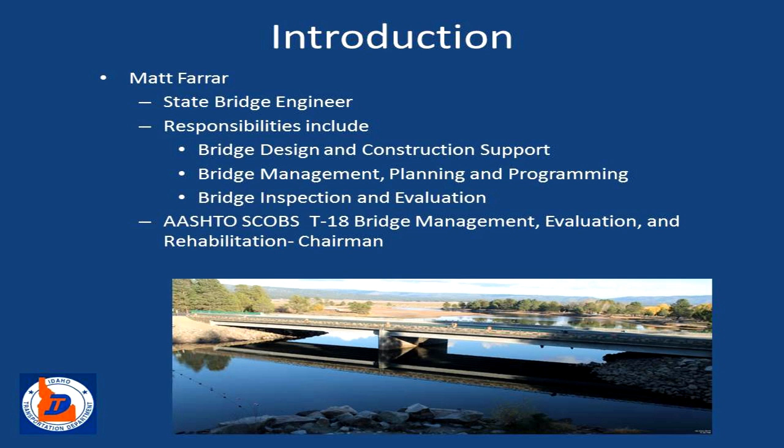It's quite an event. As Debbie mentioned, I'm the state bridge engineer for the state of Idaho. I was talking with somebody today, and he introduced me to a friend who said, 'Matt's the Bruce Johnson of Idaho.' I said, wait a minute... oh, well, that sounds pretty good, I'll take that. Bruce Johnson is a state bridge engineer from Oregon, and I have a lot of respect for him. I understand he's not here, but I thought, I'll take that. That's pretty good.

In Idaho, we spend about $80 million a year on bridges, about 15 to 20 million on bridge preservation, and about 65 million roughly on bridge restoration or bridge replacements. It's quite a challenge to address all our bridge needs with that amount of money, but we're doing our best. Along with those duties, I'm also the chairman of the AASHTO SCOBS T-18 Technical Committee on Bridge Management, Evaluation, and Rehabilitation.

What I'd like to talk about today is proposed changes on the horizon for the Manual for Bridge Evaluation and also the Manual for Bridge Element Inspection. Then I'd like to change gears a bit and talk about the FAST Act legal emergency vehicles and bridge posting, which is quite a challenge for all the states right now.

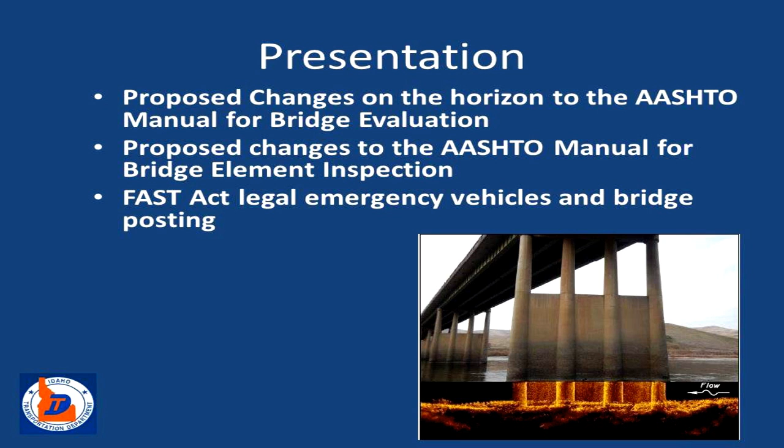I bounced this term around, T-18, and maybe a lot of you don't really follow what that means. T-18 is part of AASHTO SCOBS, and you might say, what's SCOBS? That doesn't sound very good, but that's the Subcommittee on Bridges and Structures that AASHTO has created. It's populated with the state bridge engineers from all 50 states, and FHWA is involved.

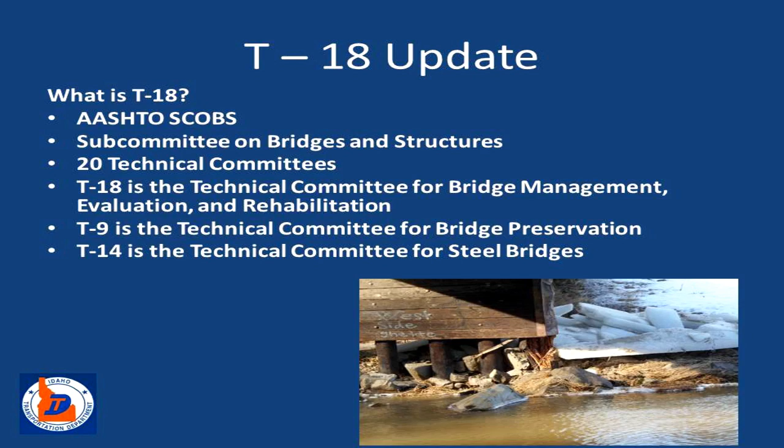There are 20 technical committees on the Subcommittee on Bridges and Structures, and T-18 is one of them. There's also T-9, the technical committee for bridge preservation, and, for example, T-14, which is steel bridges. T-18's responsibilities primarily revolve around maintaining and updating the AASHTO Manual for Bridge Evaluation, the MBE, and we also maintain and update the AASHTO Manual for Bridge Element Inspection, and I know you guys are familiar with that one.

I'm always checking to see how many people have copies of the MBE, but I know you've got copies of the Manual for Bridge Element Inspection.

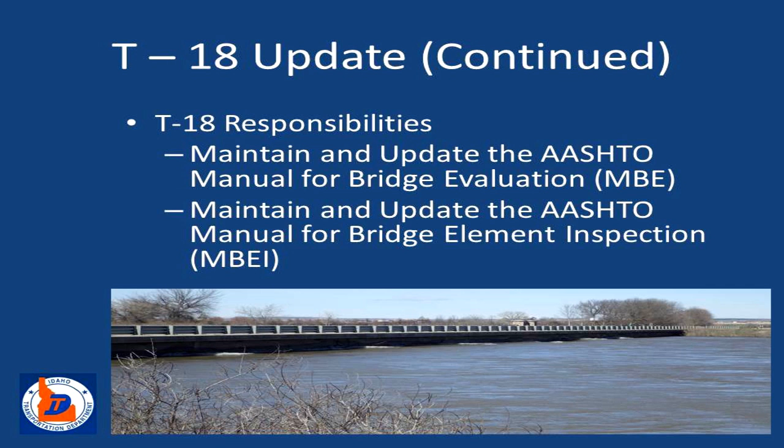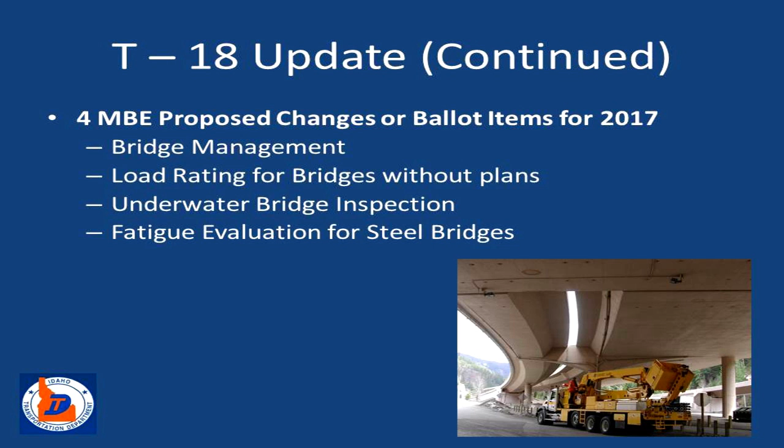For this year, we've got 4 proposed changes or ballot items for 2017, and they relate to a wide gamut. One of them's on bridge management. One addresses clarifications for load rating for bridges without plans. We've also got a ballot item on underwater inspection and acoustical imaging, and one that makes clarifications to Section 7, fatigue evaluation of steel bridges.

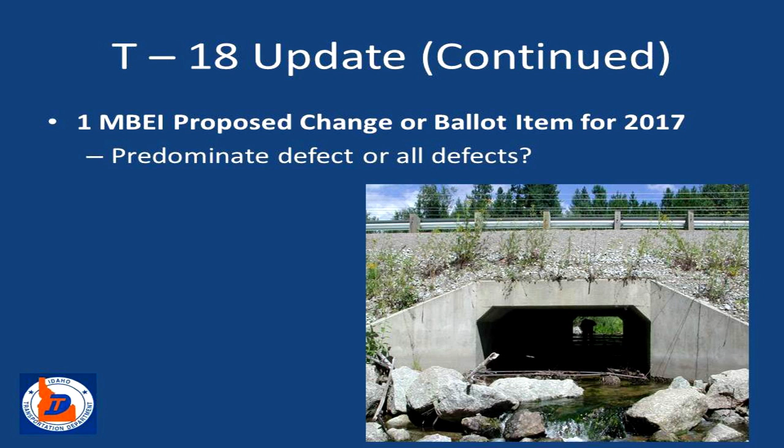Also on the docket is one proposed change for the Manual for Bridge Element Inspection. The first one is a pretty big one, a complete revision of Section 3 of the Manual for Bridge Evaluation, which covers bridge management systems.

We've taken the posture that we wanted Section 3 to be kind of a primer, an introductory representation of what a bridge management system is, what its components are, and what its purpose is. We think this is of value to the states, giving them a brief introduction before they get into all the meat and potatoes of a bridge management system.

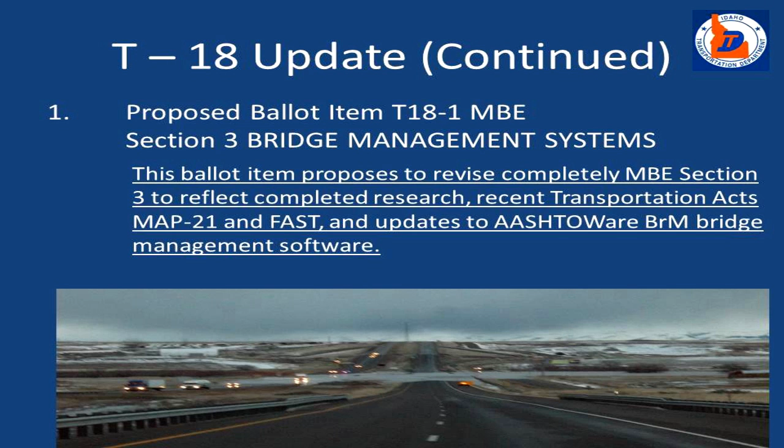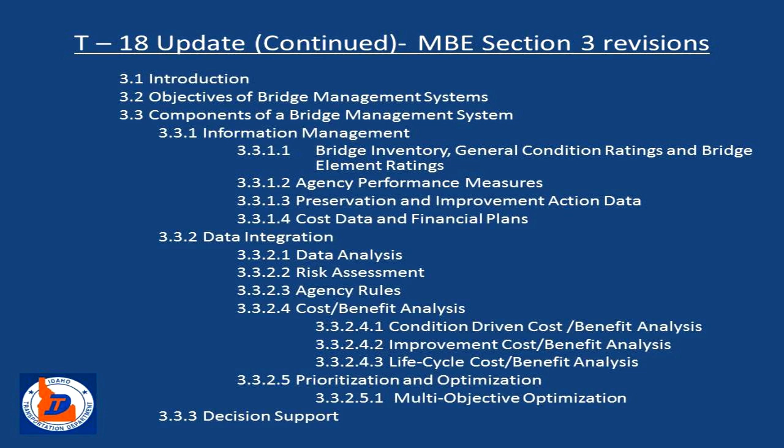We've pretty much split it up. This is a table of contents, if you can see that. It's split into objectives and the basics of the components of a bridge management system, how we integrate all that information, and finally how we prioritize projects and how we're going to spend money.

It's always good to state the objectives of a bridge management system. We use one in Idaho and have been very successful using bridge performance measures to express our bridge needs, and we've gotten our share of money from the paving guys to address those needs. But really, we use it as a tool — you can't rely on a bridge management system as your only decision maker. You've got to have engineers and bridge inspectors in the process as well. We really emphasize that in this section.

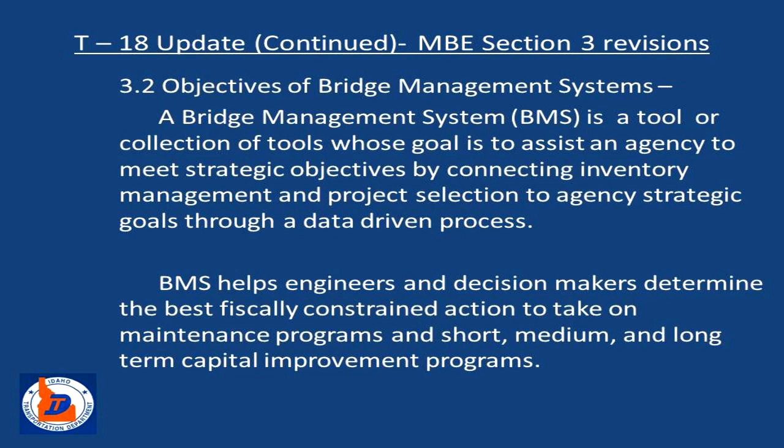The three main components of this chapter are: data and element level aspects of a bridge management system, where you've got to have a way to quantify and capture all that information; second, data integration, how we use risk assessment, agency rules, and how we make decisions on cost and benefit; and finally, a prioritization section describing how we use multi-objective optimization. We've really got a lot of mileage out of that term with management — they really like that one for some reason.

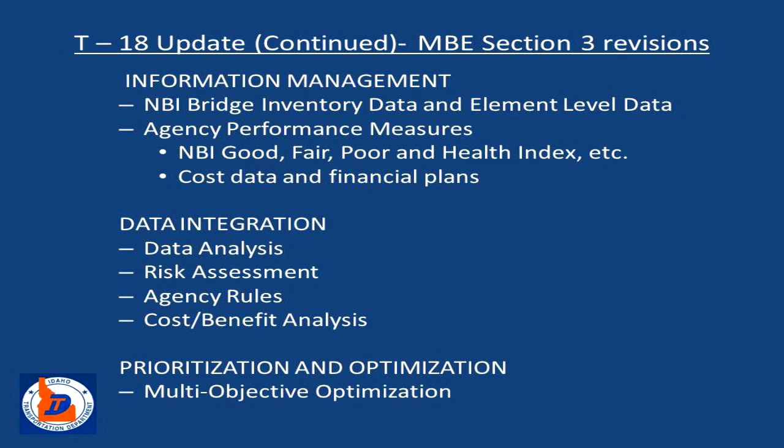But the other thing about this section that's really neat, I think, is that it mirrors the way the latest version of AASHTO-ware BRM is organized. There's a great correlation between the way they explain how a bridge management system works and the way we've described it in our section 3.

AASHTO-ware likes to think of it as a pyramid, with the base being all of our data, all the inspection data, all the work candidates or items that you as inspectors are getting and noting in your inspection reports in the field. The middle section of the pyramid is where we make all our agency rules and define how we're making decisions for the model. And then ultimately we've got the project optimization.

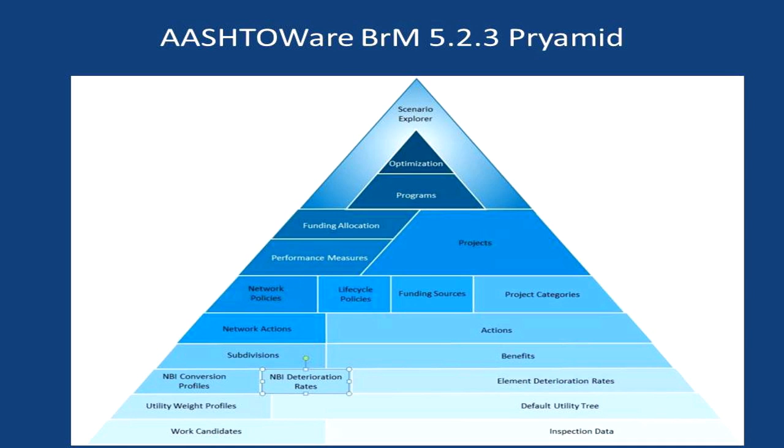Right now in Idaho, we bought some service units and we're working with Bentley, who is the prime contractor for AASHTO-ware. We're getting training on how to establish our agency rules and how to use this program. It's got a lot of bells and whistles and neat dashboards that we can use to talk with our legislature and our management about what our bridge needs are and how we're doing.

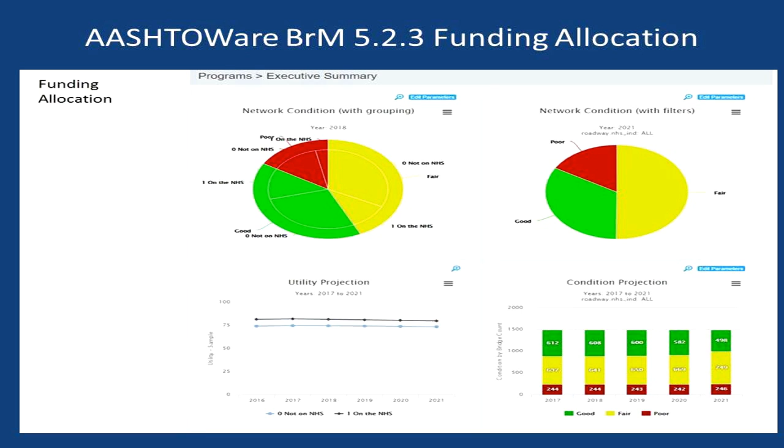Okay, the second ballot item we're working on is kind of a clarification of how you would load rate or post bridges where you don't have plans, concrete bridges without plans. In the Manual for Bridge Evaluation, we had 3 different areas where we talked about this issue. The purpose of this ballot item is to condense that all into one place and eliminate a lot of that duplication and the questions that were coming up.

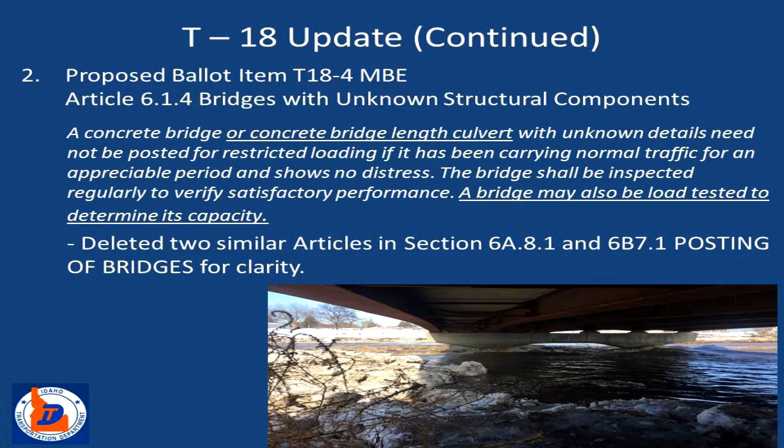The third item I think you might be interested in: through a lot of research and a lot of input from practitioners out in the inspection world, we've come up with this concept of highlighting acoustical imaging as an underwater inspection technique that could be used where diver safety is an issue. A lot of times we're faced with rigid inspection cycles for underwater inspection, and sometimes we're required to go out and do that inspection when conditions aren't ideal for divers.

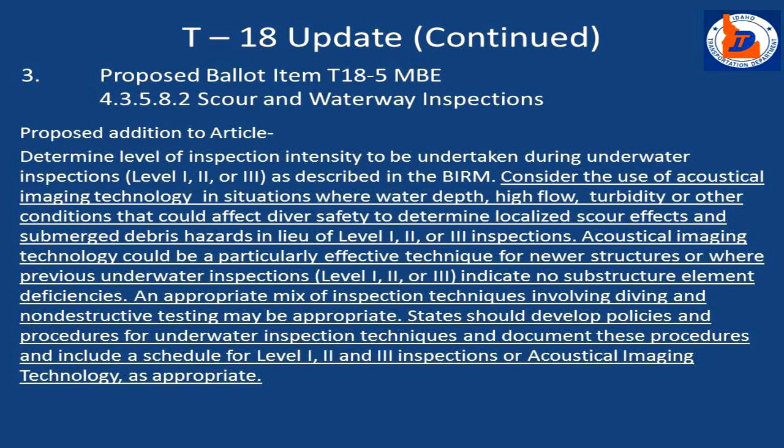On T-18, we have many states along the Mississippi and Missouri rivers that have worked collaboratively with FHWA to utilize this acoustical imaging. In Idaho, we've done quite a bit of work with acoustical imaging, and from our point of view, we think this really satisfies the majority of our questions about underwater inspection, particularly when it comes to scour, what the channel bottom is doing, and debris buildup.

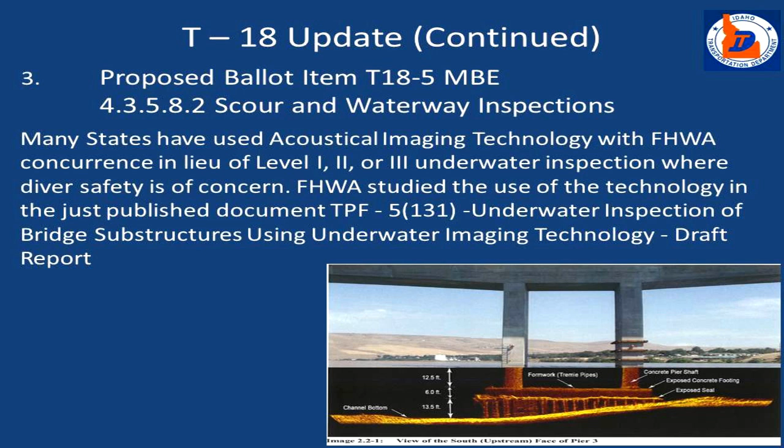We know it's not as good as a hands-on inspection by a diver underwater, but a lot of our bridges are in relatively new condition, and we've done level 1 and level 2 inspections. We think in cases where the water level is high or where it's not easy to get a diver in the water, we ought to be able to utilize this acoustical imaging. And coincidentally, FHWA had done a pooled fund study 3 or 4 years ago.

We just got word that they're about ready to publish the draft research report from that pooled fund study, and we believe that document will support our efforts to change our Manual for Bridge Evaluation and work with the feds in this particular area. As I say, we've used this method in Idaho, we think it gives us good results, and a good picture of what's happening underneath the water without actually having to get a diver in the water.

Again, if you've got a very old substructure with a lot of deterioration or spalling or other issues, maybe acoustical imaging by itself is not the best approach. But we believe this is a really valid, useful approach if you've done previous underwater level 1, level 2, and level 3 inspections.

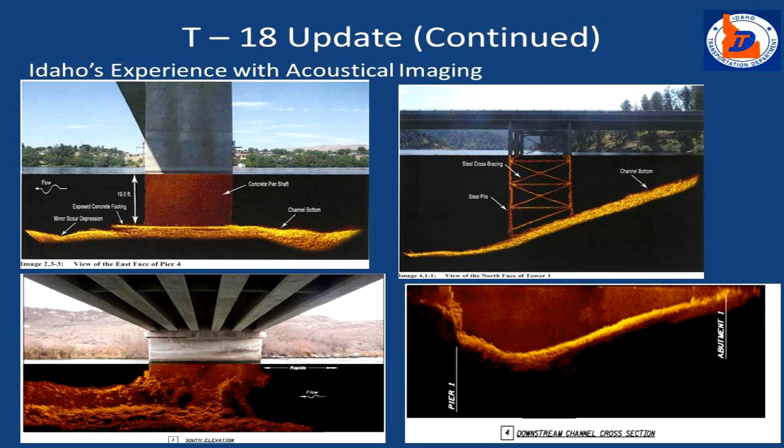So it's kind of a chicken and the egg. We're changing the MBE, and we're working with FHWA to work this into their mix. Really what we are proposing to the states is that they document what kind of underwater procedure they're doing and why they would use acoustical imaging over the traditional methods. In the preliminary conversations we've had, if you document that and you've got a rational approach, we think this is something that's going to be acceptable to FHWA.

The last ballot item deals with fatigue evaluation of steel bridges, and it's mainly an update of this section regarding some changes we made to the LRFD in terms of load factors and stress ranges.

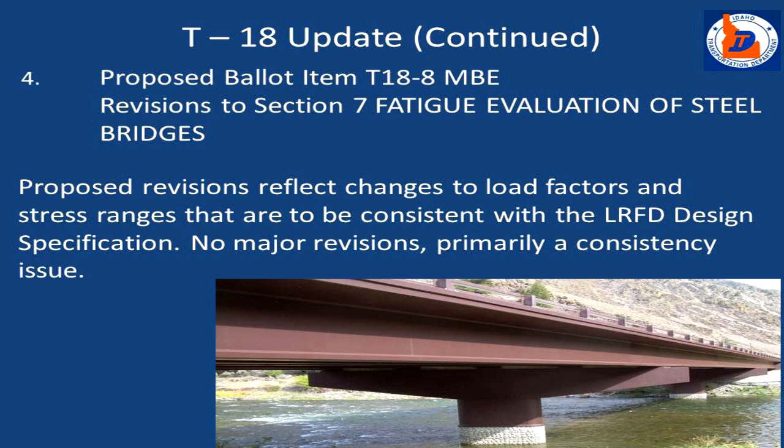Another big item that affects you all directly is a ballot item we kind of came late to. We're working with FHWA to move forward on this, but we're not going to vote on this particular one. We are trying to work with FHWA and get this information out to all the states, and it revolves around the idea of, for fracture critical members, the designation of internal redundancy.

Internal redundancy is applicable when you've got built-up, riveted, plate girder type members. There's a lot of research going on in this area, and they've demonstrated that if you've got a built-up plate girder and you fracture one of the plates in that built-up member or an angle, you haven't necessarily lost the whole bridge. So the research has come up with the term internal redundancy.

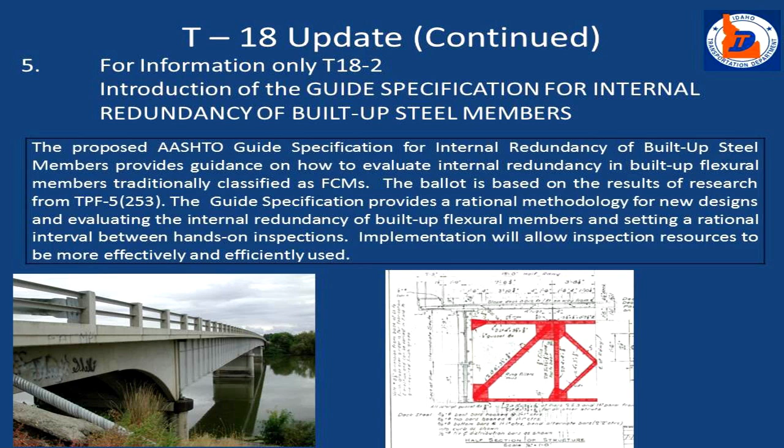They've established a procedure through this research whereby we could adjust the inspection frequency. In the information we're getting out to all the states, we've got a little example. This particular example is a 75-foot simple span, 2-girder built-up plate girder, riveted, that we're considering in a faulted and unfaulted state.

There's a lot of bullet points on this thing. I don't expect you to read them all, but basically what we're doing is assuming that one of the plates fractures, and then we're checking a strength case to make sure the bridge doesn't collapse and that it can handle the loads. The load we're putting on that is an HL93 live load.

So if it makes the strength case and is able to stand up, we check it for remaining fatigue life. According to the research, and FHWA is aware of this research and has supported it all along, you determine a remaining fatigue life, and then they have a method where you can determine your inspection frequency. In this particular example, they were able to extend the inspection frequency up to 8 years. That's a pretty big change from 2 years to 8 years.

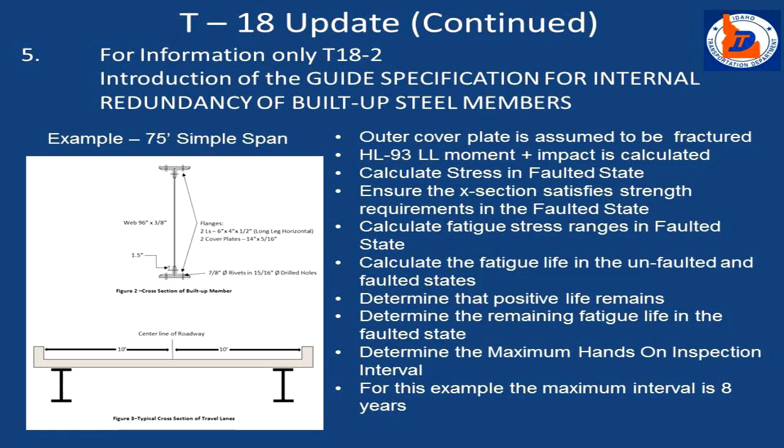I imagine you're kind of going, what? How does that work? But with this method, we don't intend to have to change CFR or any of the definitions required in there. When we designate that it has internal redundancy, and we've gone through this policy and procedure and research that's been done, it's no longer fracture critical. By that method, we don't have to apply the definitions of the CFR, and we're able to establish a longer, potentially longer, inspection frequency.

So this one's pretty big, potentially could be a game changer for you all. We're currently talking with FHWA and Shay and Joey Hartman and the whole gang, because this one may be viewed as somewhat controversial. And lastly, the one item that we have for the manual for bridge element inspection is one that's been out there for a while.

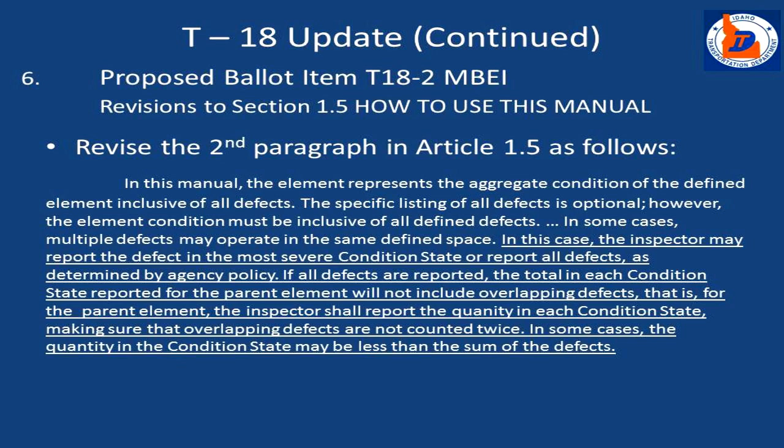Currently, for bridges on the National Highway System, we're all collecting element level inspection data. But we're not required to collect defect quantities. Some states do, and Idaho does, and we use that information for our maintenance management systems. One aspect of the element level inspection is that we always record the predominant defect, or predominant defect that defines the condition state.

With this ballot item, we're giving the option to collect quantities of defects that are overlapping. Right now, the way the manual for bridge element inspection is written, you collect the predominant defect, the quantity of the predominant defect. With this proposed ballot item, we're allowing states, if they'd like to, not mandatory, to collect this overlapping defect information and utilize it for their maintenance management systems.

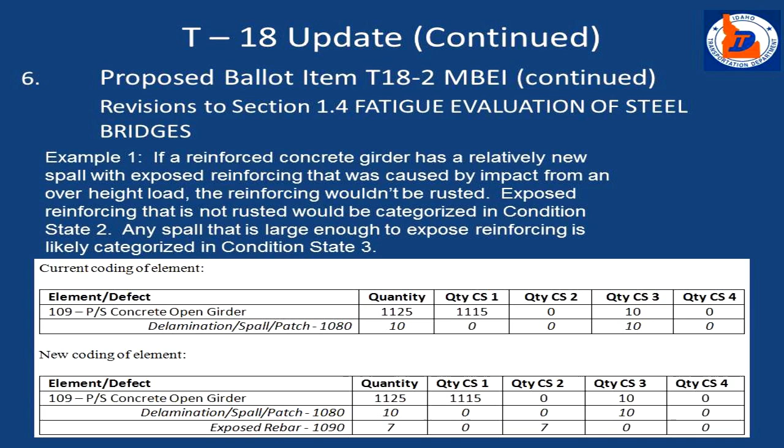Okay, I'd like to switch gears now from ballot items and talk a little bit about FAST Act vehicles and other vehicles on the horizon.

These FAST Act vehicles are, as Shay mentioned, somewhat controversial, because states are required at the end of March to submit their plans on how they're going to rate all their bridges on their interstates and potentially post those bridges for this emergency vehicle. But in the FAST Act, there were a lot of vehicles. That emergency vehicle was only one of them. There's also the heavy-duty tow and recovery vehicles, and individual states were called out for specialized vehicles and milk products.

The whole gamut is out there on the horizon. And if you're in the load rating world, you're pulling your hair out right now.

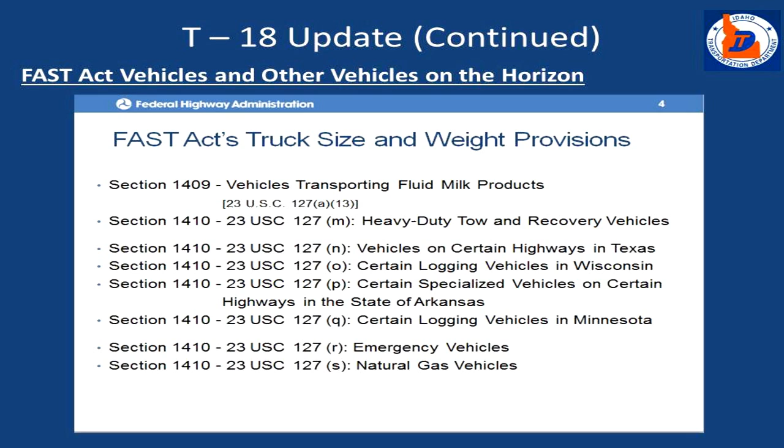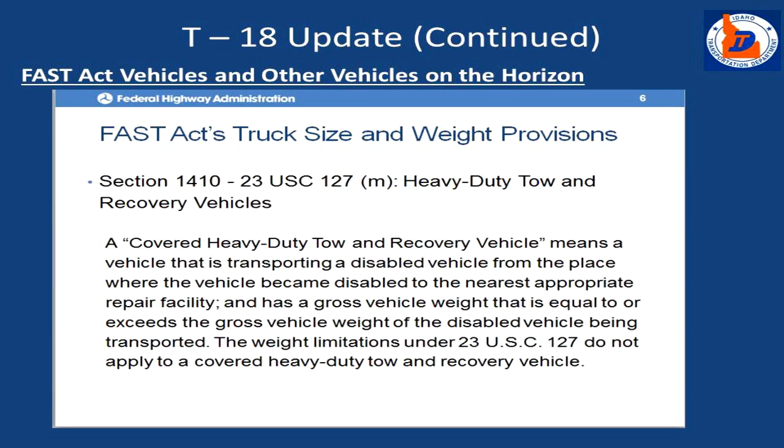I don't have much to add about the heavy-duty tow and recovery vehicles. I'm glad FHWA is working through that, and they haven't really offered any technical guidance to the states as yet on it, and we'll wait to hear from where you're going with that.

The other big one, though, is this emergency vehicle. These emergency vehicles are single-unit trucks, and they can have single axles or tandems, 3-axle trucks. But they definitely do not follow federal Formula B, and most states' weight limit statutes follow federal Formula B. These don't. And in Idaho, these vehicles are not permitted off the interstate. You need a permit to use these vehicles, but on the interstate, they're legal.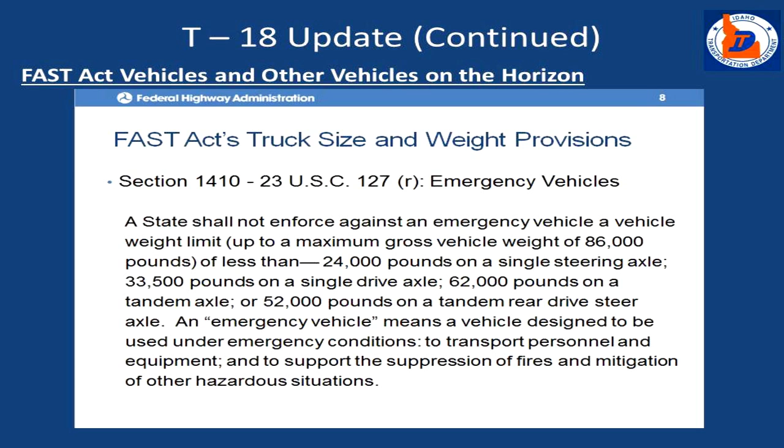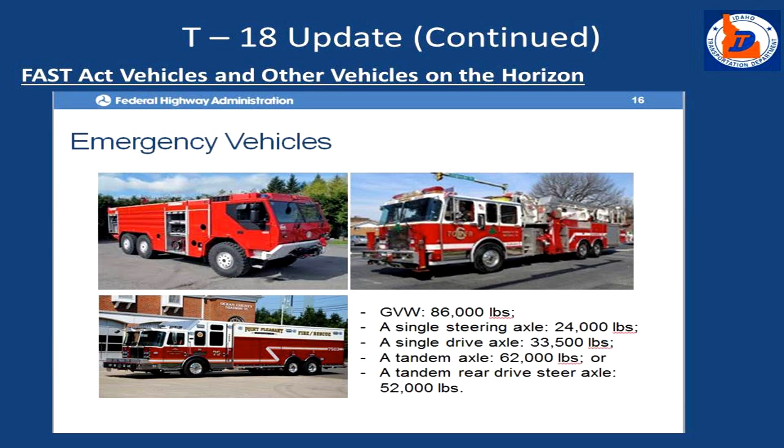But as I said, in Idaho, we've screened our bridges. We have about 22 bridges on our interstate system that would require posting. We're not completely done with all of our load rating, but we have about 22 we've got so far on our interstates that would require posting, and another 44 bridges within the 1-mile radius of the interchanges that would require posting. And so we're trying to figure out how we're going to operationally make this work.

Because you don't want to put a posting sign up on a bridge on the interstate and then have that vehicle get that far and then have to back up or turn around, so we're trying to think operationally how we would post at the nearest interchange.

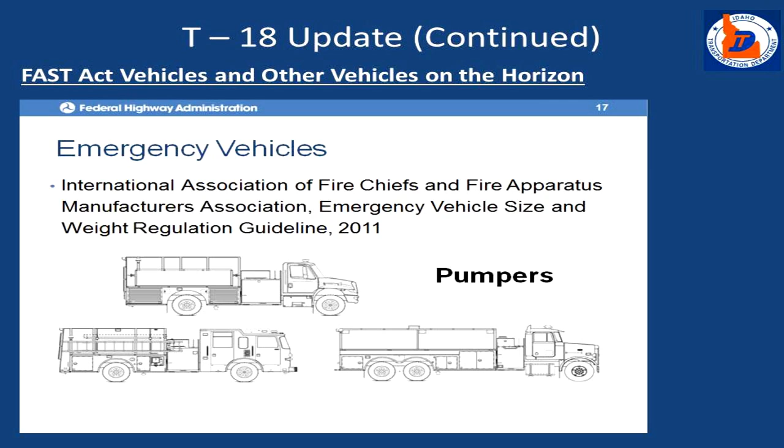And also that might be at the state line, or we might come to our neighboring states and say, we'd like to put a posting at the closest interchange to the border to let these trucks that are going—they aren't originating in Idaho, they're going to be coming from another state going somewhere else. So we've been talking with our division bridge engineer and thinking about how we're going to apply this, but it's a question that every state is facing.

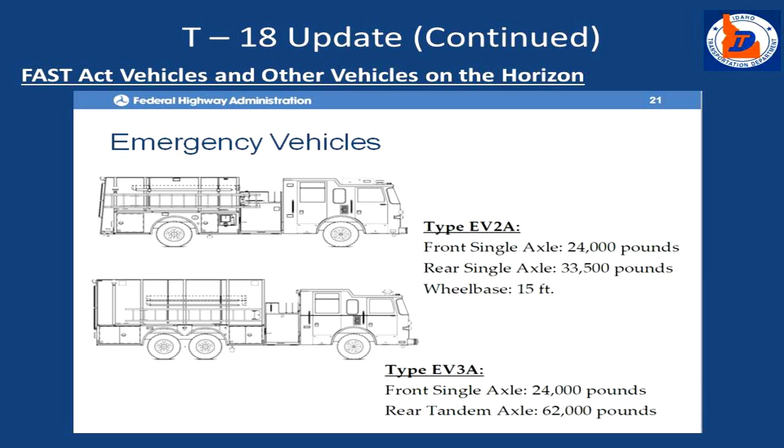One aspect of these trucks, anecdotally, I heard 31 states have statutes that say if it's legal on the interstate, it's got to go anywhere in the state. So the challenge for those states that have those statutes is they've got to load rate all of their bridges for these emergency vehicles, and that's a huge cost, and it's a huge time constraint.

When we load rate them, some of them come up that we got to post them, and FHWA has worked with MUTCD, and they've proposed that this is the sign that we would use to post out on the interstate.

And I know in Oregon, you've got the SHVs, and you've got posting signs for those, and you've got your regular posting signs, and now potentially you've got another posting sign, and you can kind of see what the confusion's going to be if we've got all these signs out there. So it's a big issue, and T-18's trying to work with all the states and FHWA to try to come to a conclusion on how best to do this.

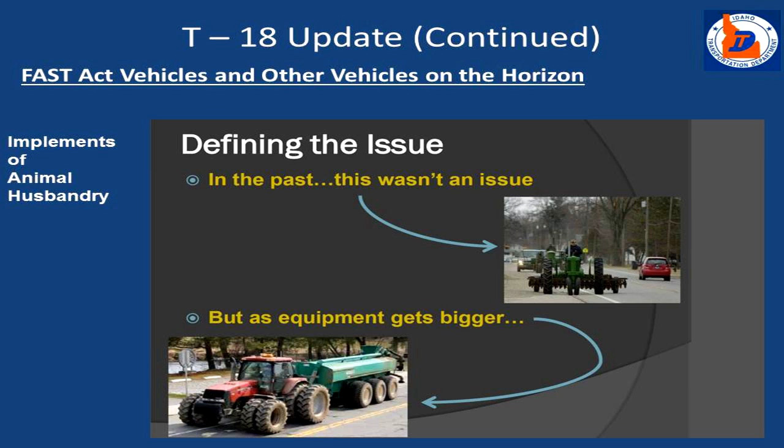The other thing I'd like to talk about is not in the FAST Act, but it's an issue facing many states that have big agricultural industries, and it's these implements of animal husbandry. And you can see from the picture, 40, 50 years ago, the tractors, the old John Deere tractors, weren't that big. They were tri-axle or tricycle type tractors, and the whole farming industry's changed. We got these huge vehicles with trailers with fertilizer and all sorts of things out there now. And they're not just traveling the farm fields, they're traveling on our local roads and sometimes on our state highways.

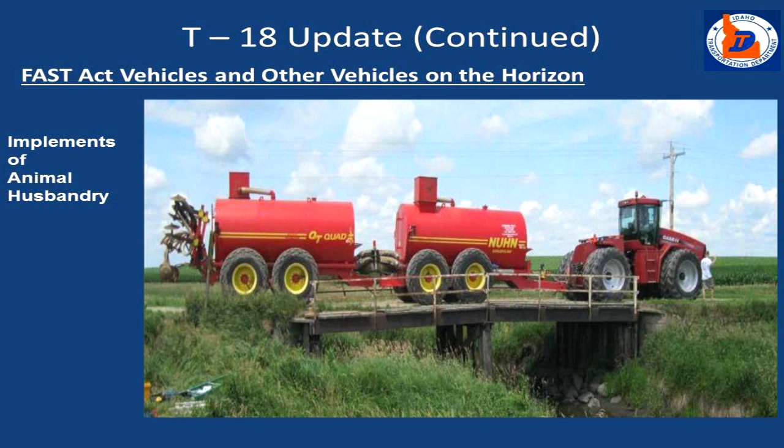There's very hard to define. There's tons of different configurations that are out there, but they have big axle weights. A lot of these would not be defined as being legal. And there was a pooled fund study out there organized by Iowa and Illinois, Kansas, all the Midwestern states, and their legislatures have enacted statutes that have made these kinds of vehicles legal.

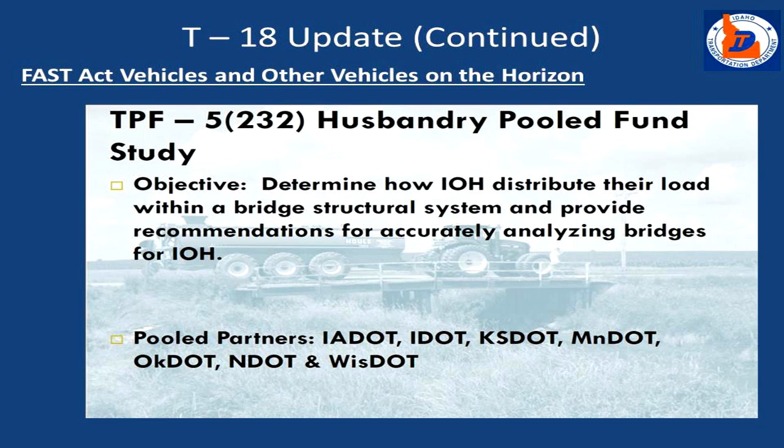We haven't got that far in Idaho. Our legislature has not made these legal, and so they would need a permit to travel on our state highways or local highways. But along with that pooled fund study, there's also been an NCHRP study that's been initiated, and it's underway. We've got some T-18 representation on that NCHRP panel. It's going, it's underway, and results are expected, I think, in 17 or 18.

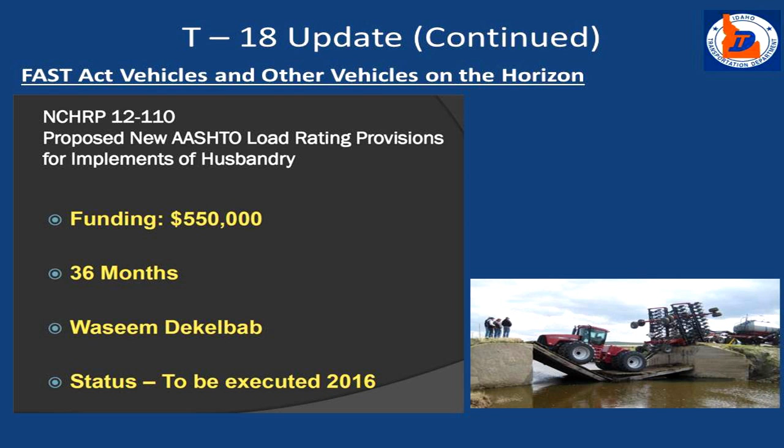In conclusion, I just would like to stress that we're looking for ways to improve the inspection and evaluation manuals and manual for bridge element inspection. That's kind of our mission on T-18, and we accept any kind of input. We'd like to hear from you folks in any way we can and try to make this better and more useful. Thank you.